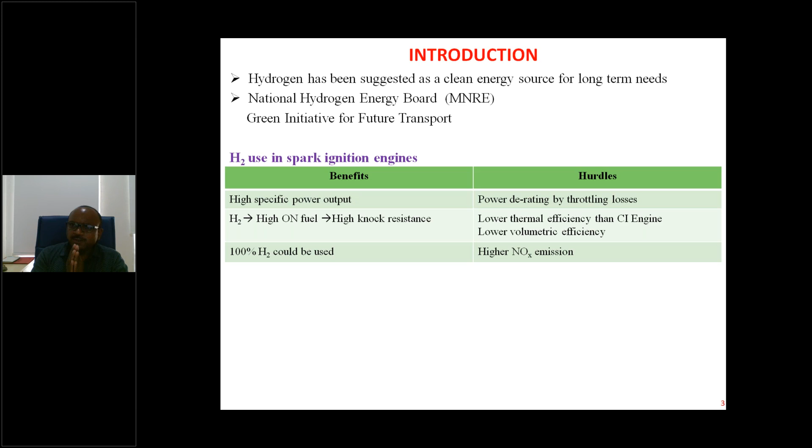However, we are using hydrogen in diesel engines because in our India, diesel consumption is high. Are you able to see the second table? India is a diesel driven economy. Last line, are you able to see the diesel to gasoline ratio? Yes sir, visible sir. Okay, very good. Diesel to gasoline ratio in India is 6:1, meaning 6 liters of diesel we use for every 1 liter of petrol.

In USA, diesel is used 1 liter, petrol is used 2.2 liters. In the entire world, average use of diesel is 1 liter and petrol 1.1 liters. So as per the Indian context...

...as we use more amount of diesel, in other sense, we use heavy duty vehicles, diesel engines. We use diesel engines in all heavy duty vehicles - buses, trucks, transport vehicles, mass transportation, public transportation, even marine transportation like ships, and rail transportation, locomotives, where diesel is used. One of the largest consumers of diesel in India is railways, they consume almost 35 to 40% of the total diesel in India. Next, many heavy duty vehicles are run with diesel engines.

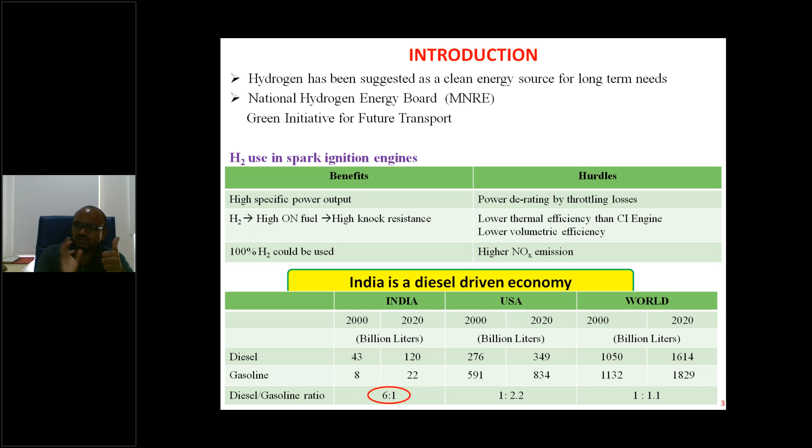Using hydrogen in diesel engines has certain complications. One major issue is we cannot utilize the full amount of hydrogen in diesel engines, meaning we cannot fully replace diesel with hydrogen. Like in a petrol vehicle, I can remove the petrol tank and employ a hydrogen tank to supply hydrogen fuel, and the petrol vehicle runs. The same thing cannot be done in diesel vehicles.

In a bus, I cannot replace the diesel tank with a hydrogen tank. The diesel tank cannot be replaced with a hydrogen tank. Hydrogen cannot be used fully in diesel engines.

What is the reason? Can anyone guess? Why can't we use full hydrogen in diesel engines? Can anybody guess the reason?

Gaseous combustion. Better combustion. Yeah, maybe due to combustion issues. Very good, combustion issues are the major problem. So this may be due to the proper... Sir, am I audible? Hello? Yeah please, everyone is audible.

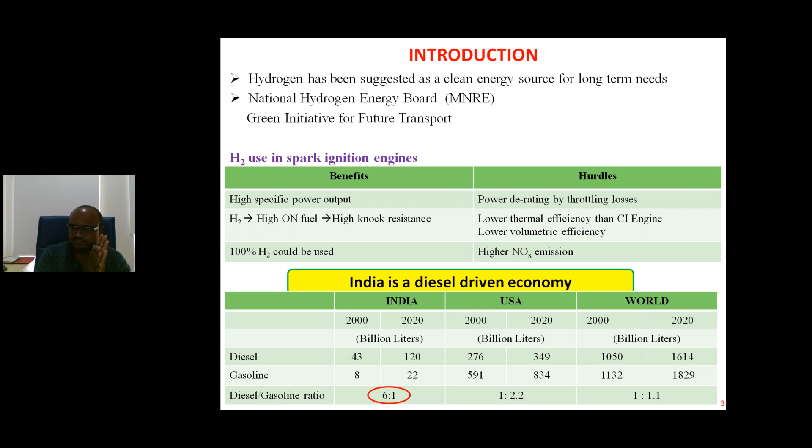We need certain ignition aid, certain ignition supplementation. Like in our home kitchen, while starting a stove, you give one spark. That spark is enough to burn the entire LPG, entire butane, or entire gas. If it is PNG, entire gas. In the same way, in a spark ignition engine, a petrol engine, you use a spark plug. It creates the spark, and that spark is enough to start the combustion.

In case of diesel engine, there is no spark, so ignition cannot be initiated by itself in a compression ignition engine. In order to address this issue, either we can provide an external spark plug in the diesel engine, or we can use a small amount of diesel for starting the combustion.

Once combustion is started, it spreads throughout the combustion chamber. Suppose in the combustion chamber I have 100 units of hydrogen particles. If one particle is ignited, that spreads the ignition or combustion to the other hydrogen particles.

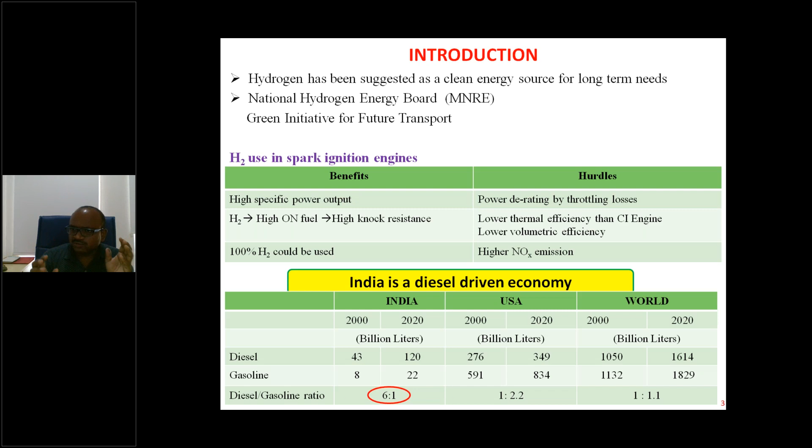With one matchstick, we are burning the entire village. One matchstick is equal to a small amount of diesel fuel, and the entire village refers to the hydrogen fuel. That is why the concept of dual fuel comes into the picture.

As I am using diesel and hydrogen, both fuels in a diesel engine, the concept of dual fuel engine arises. Dual fuel, in the name itself, indicates two fuels are being used simultaneously.

I would like to mention a basic difference between bi-fuel engines and dual fuel engines. You might be aware of CNG and petrol fueled vehicles. In cities wherever CNG infrastructure is laid, like Delhi, our city Vadodara, Bombay, Hyderabad, many metropolitan cities, Vijayawada, you have CNG fueled autos, buses, and transportation fleets.

CNG and petrol, both are used in these vehicles. If CNG is not available, you can run the vehicle with petrol. Those vehicles are called bi-fuel engine based vehicles. Bi-fuel engines are different than dual fuel engines.

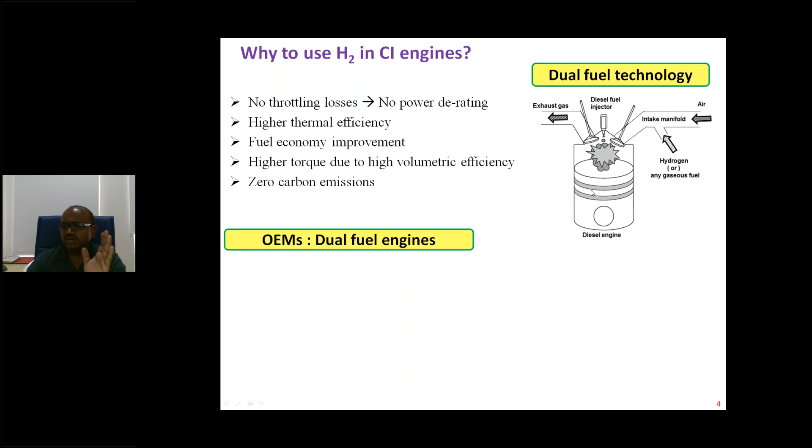So if the hydrogen fuel is exposed to any slight kind of spark, or sometimes tolerable temperatures, then accidents may happen. So safety aspects are the third modification that you need to address, other than the basic engine configuration. Okay, let us move ahead.

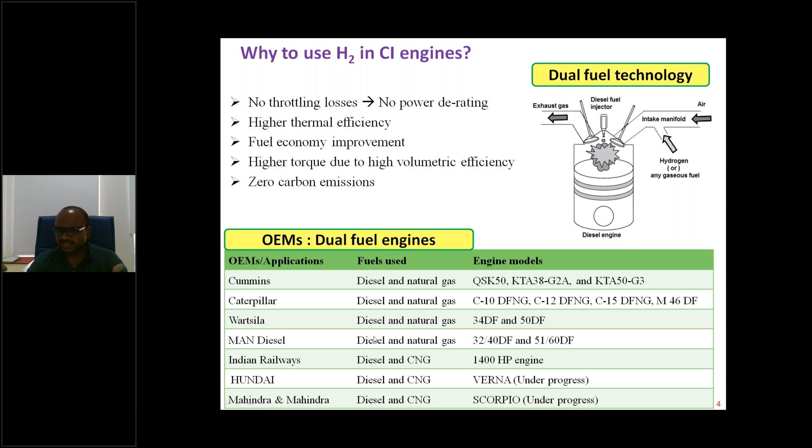Many dual fuel engines can be found in practice. Already some commercialized dual fuel engines are available in the power generation sector, even in the transportation sector. Some of the companies I have mentioned here.

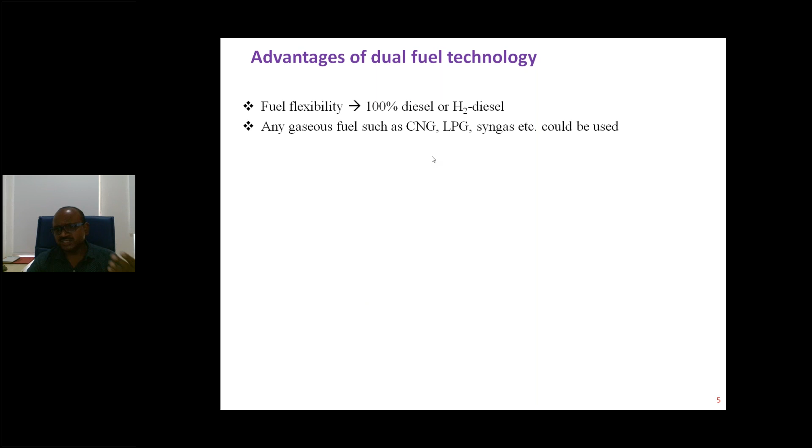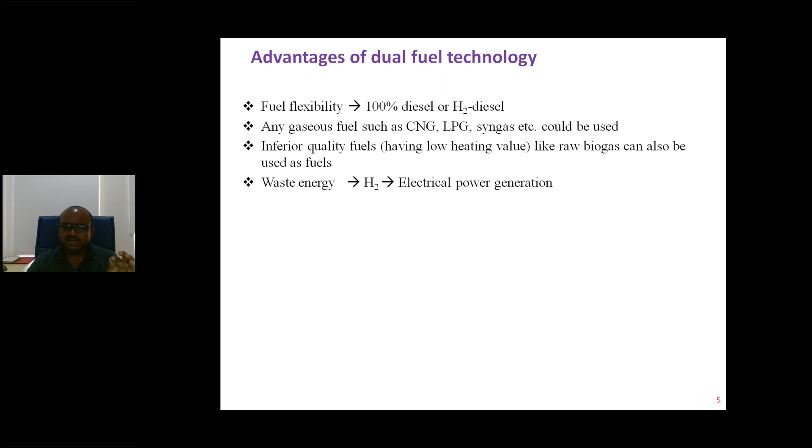As I mentioned, many advantages are there with dual fuel technology. You can use 100% diesel if hydrogen is not available, or any low inferior quality fuels like LPG, CNG, which have lower calorific value, can also be used in dual fuel technology. Instead of hydrogen, you can also use CNG, LPG, and syngas. Even biogas, which is generated from waste, can be used in diesel engines under dual fuel mode.

Hydrogen can be produced from various kinds of resources, starting from any waste, any organic waste material, to water. With simple water also you can produce it. Higher thermal efficiency, carbon emissions zero, less smoke emissions - these are all the different advantages.

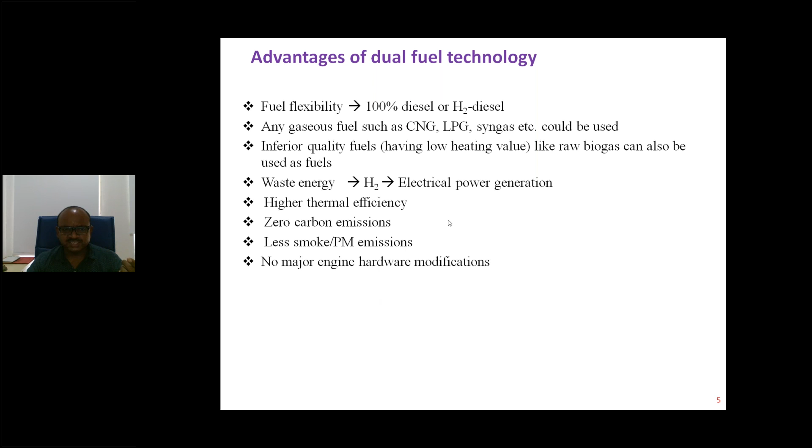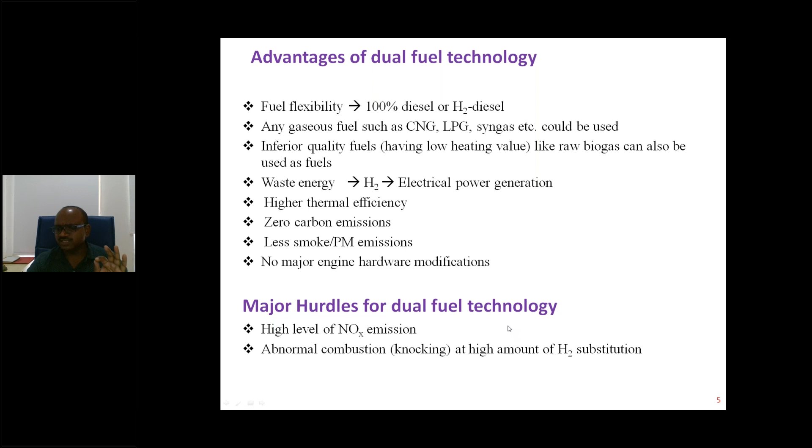However, as we are discussing, the major hurdles, major difficulties in use of hydrogen in diesel engines are higher NOx emissions. Though carbon emissions are zero, NOx emissions - oxides of nitrogen, NO, NO2, NO3 - these kinds of emissions are high in case of hydrogen fueled vehicles. And combustion problems like abnormal combustion is the biggest problem in utilization of hydrogen in diesel engines. So we need to tackle these disadvantages, these hurdles, while implementing hydrogen in diesel engines.

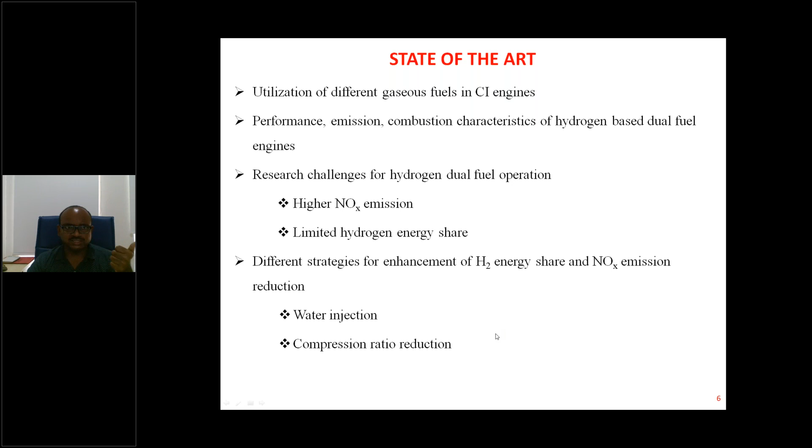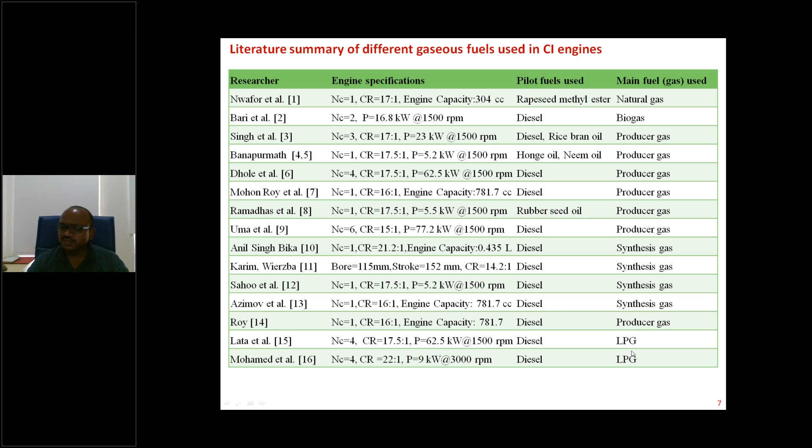As time is limited, I'm just skipping the state of the art. You can go through the literature where you can find use of different kinds of fuels, not only hydrogen, like natural gas, biogas, producer gas, synthesis gas, LPG can also be used in diesel engines under dual fuel technology.

If you go through the state of the art literature, you can find that hydrogen was used in diesel engines with less quantity. Maximum amount of energy used at full rated load, 100% load, is 16% in the literature, without modifying or any major engine modifications or any other strategy employed. Some people have achieved up to 14% of hydrogen energy without major modifications. This is what the literature concludes.

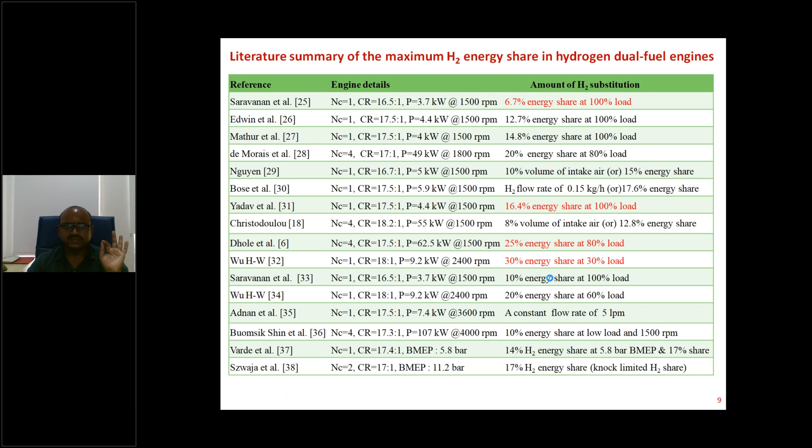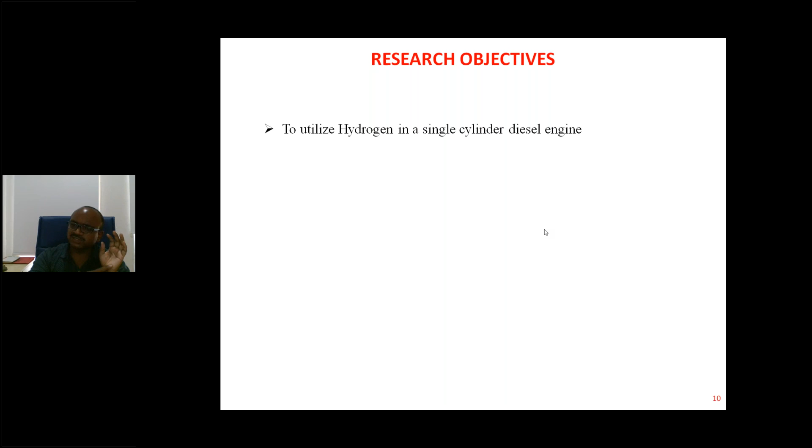With these conclusions from the state of the art, our future ambition is to enhance the hydrogen energy share in the diesel engine from 16%, which was reported in the literature, to higher limits. Without changing any engine configuration, you can add hydrogen in the engine up to 16% energy. That is what literature says.

Now my research target was to enhance this limit to higher limits. The higher limit may be 20%, or it may be 30, 50, 60, 70, 80%, by employing even a small modification or some additional technology or additional equipment with the diesel engine. So these are the main goals: enhancing the amount of hydrogen supply with different strategies and comparing the different strategies.

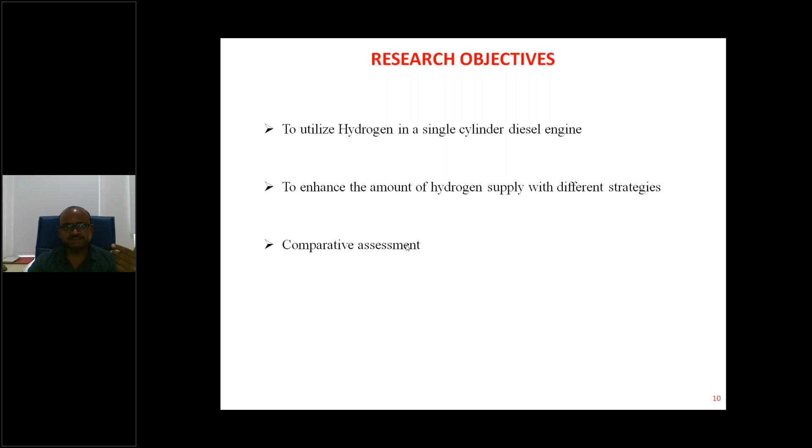For this, the research methodology is basically about developing the experimental setup and then conducting experiments on the basic engine without changing any modifications, employing hydrogen, to find out what is the tolerable limit with my original available engine. In the third stage, I need to employ any additional technology or additional media or additional fitment so that I can enhance the hydrogen energies to higher levels.

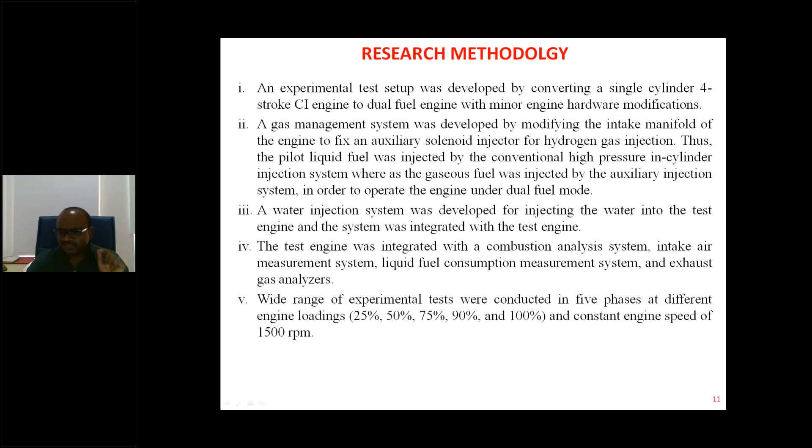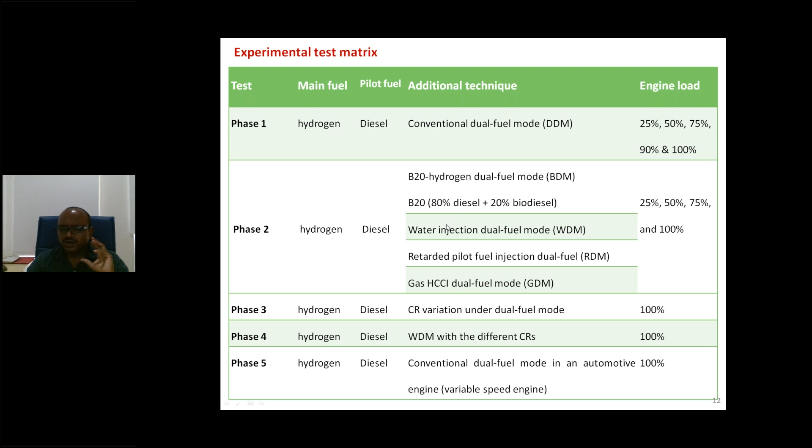For this research target, I have structured the total experiments into 5 phases. In the first phase, a basic configuration of experimentation has been done, called conventional dual fuel mode, where hydrogen is used as the main fuel and diesel as the pilot fuel at all engine loads. In the second phase, I conduct experiments with different strategies like using biodiesel, water injection, retarding the fuel injection, or using gaseous homogeneous charge compression ignition. These are the different ways to enhance the hydrogen energy share in the diesel engine.

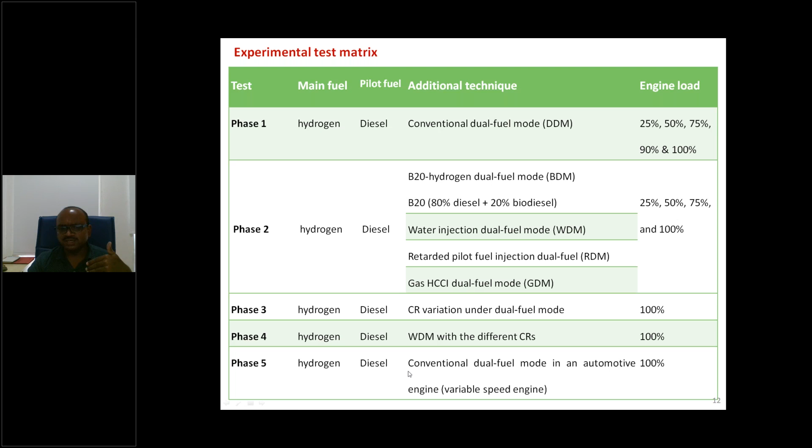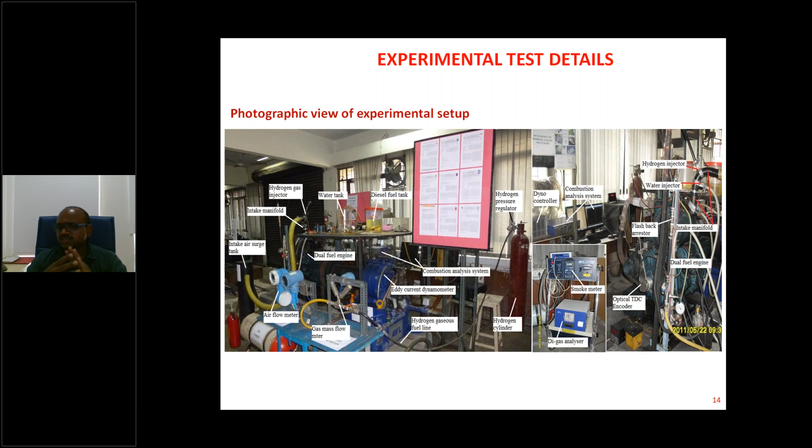So the basic experimentation consists of measuring parameters related to the fuel, the air, the water, and the biodiesel, whatever fuel is being applied, and related to the pollutants. These are the basic measuring devices and measuring domains that I have shown in the picture.

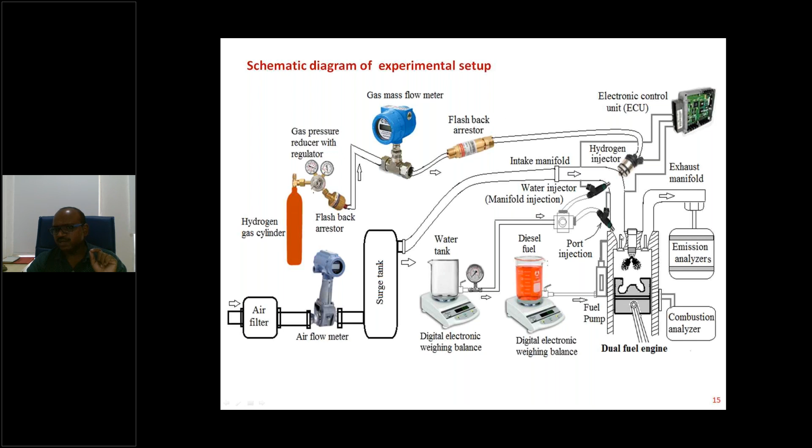This is the schematic diagram which clearly represents the entire experimental setup. You can clearly understand this is the hydrogen line from cylinder to flow meter, flashback arrestor to the hydrogen gas injector, which is controlled by the electronic control unit, and hydrogen is injected in the intake manifold. This is the air flow line for air consumption, and this is the fuel consumption line. As I mentioned, water is also inducted and measured in the intake manifold or intake port.

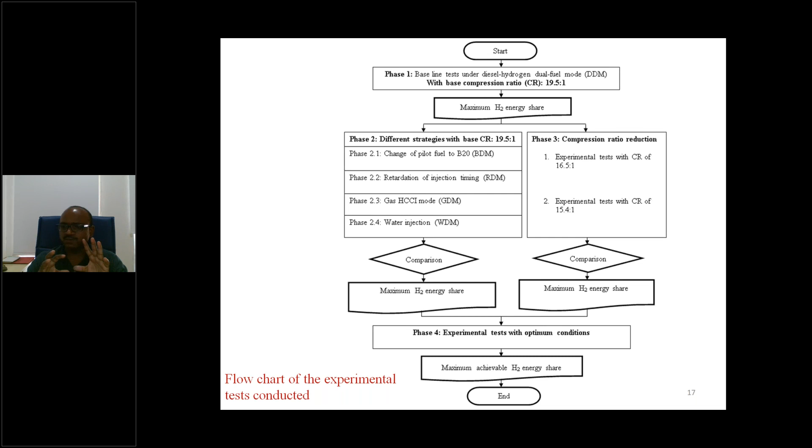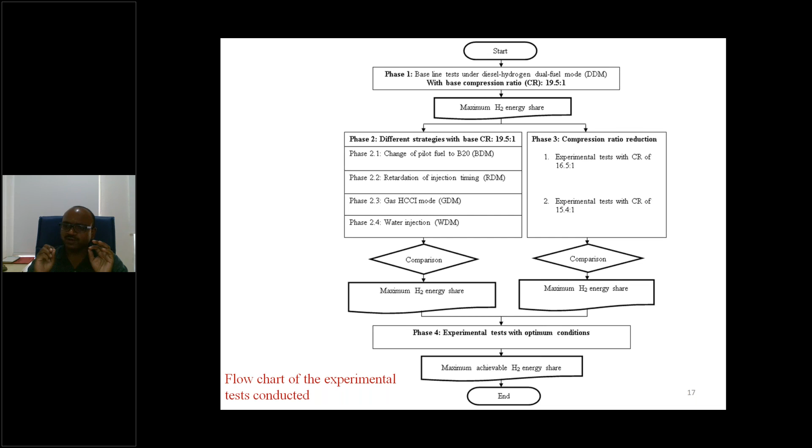With this phase 1 experimentation, my objective is to find out the tolerable hydrogen share. Tolerable hydrogen share means without disturbing the engine, without disturbing the combustion, without disturbing the efficiency, without disturbing the emissions, how much amount of hydrogen can be substituted or added in the engine. That is my first goal in the first phase of experimentation.

Once the maximum hydrogen energy is known with the first phase experimentation, then with the preliminary results, I can...

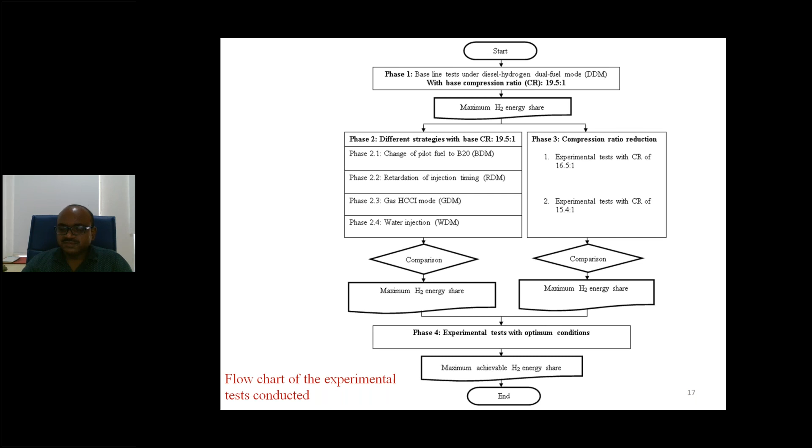There seems to be a network issue, the audio is coming slowly. Let me speak louder. Someone mentions it is a problem with others also, but confirms the voice is clear and audible, no issues at all.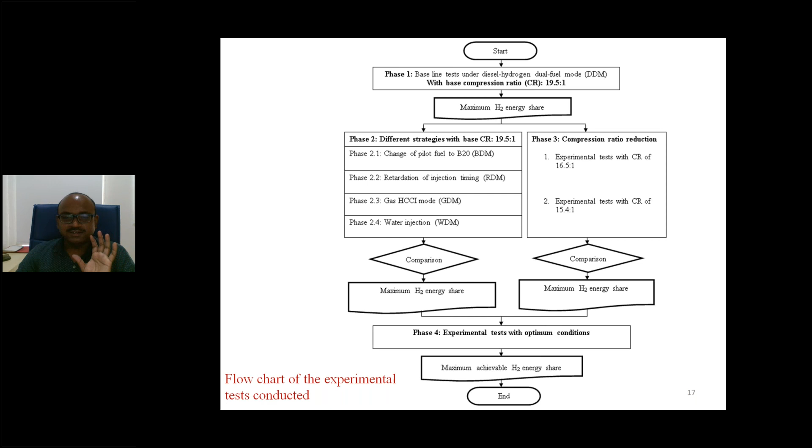Good, thank you. So try to understand this flow chart. I'm a bit in a rush because many slides are ahead, but I will try to provide the concept so that you can get the clutches of the work.

In second phase, once after knowing the basic preliminary data that my actual engine can absorb the hydrogen this much share, say 16%, 17%, or 18%, I need to add some more technology or strategy to boost the hydrogen share. In second phase, I apply biodiesel, retardation injection, gaseous hydrogen, homogeneous charge compression ignition (HCCI) mode, and water injection mode. With this, I can increase some amount of hydrogen level.

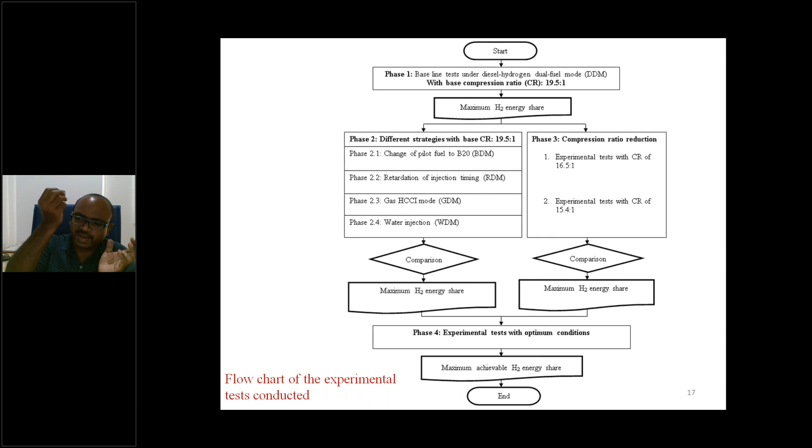In the third phase experiment, by reducing the compression ratio, I can still increase some amount of hydrogen. By comparing these two results, I can take the advantage of second phase experimentation and the advantage of third phase experimentation, then combine these two benefits in the fourth phase experimentation so that at the end, hydrogen share could be increased to the maximum extent. That was my final goal.

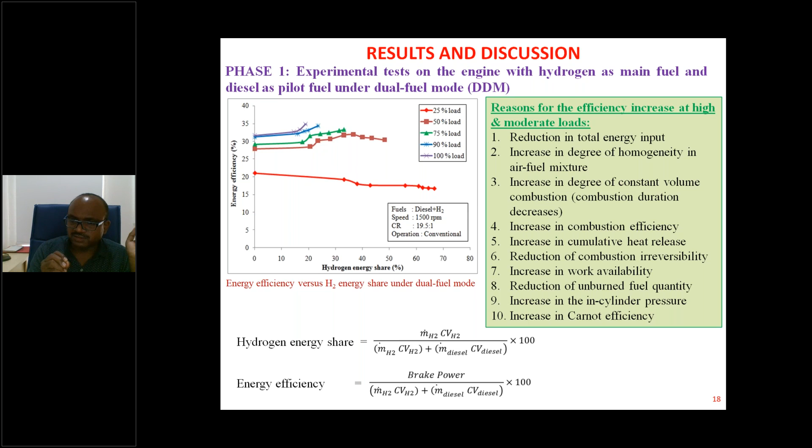Other reasons I have mentioned here, you can go through later. Not only energy efficiency improvement, not only fuel economy improvement with the hydrogen implication, we can also observe - let me explain.

Not only with efficiency, it also helps for pollution reduction. Let me just go through the slides, figures which are evidential for the efficiency improvement. Here you can see specific energy consumption is being reduced, because of which hydrogen energy efficiency is being increased.

Ignition delay is being decreased with hydrogen, so efficiency is increased. Combustion efficiency will improve with increasing amount of hydrogen share. This graph represents combustion efficiency, and combustion duration is decreasing. As the flame speed of hydrogen is high, the total time taken by combustion, known as combustion duration, reduces.

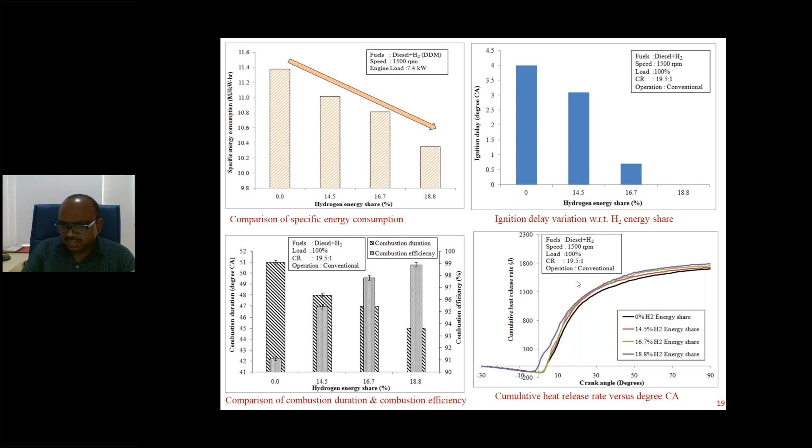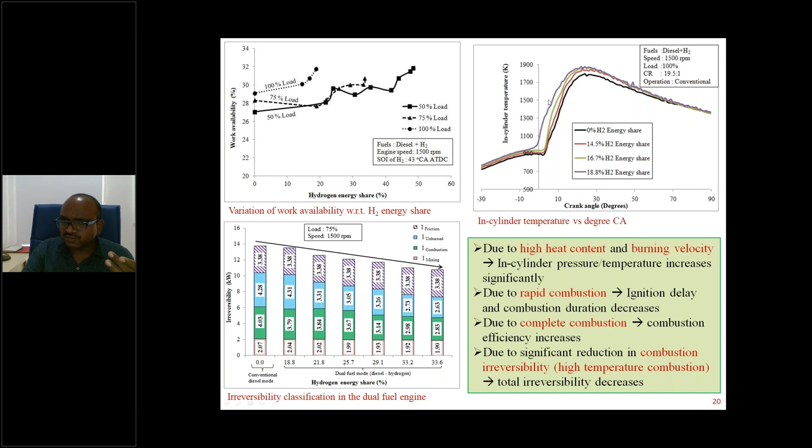These are all evidential proof for higher energy efficiency. This cumulative heat release also increases with hydrogen, and exergy efficiency will also increase. In-cylinder temperature also will increase. This is the combustion parameters, which I will be explaining tomorrow, so I'm skipping now.

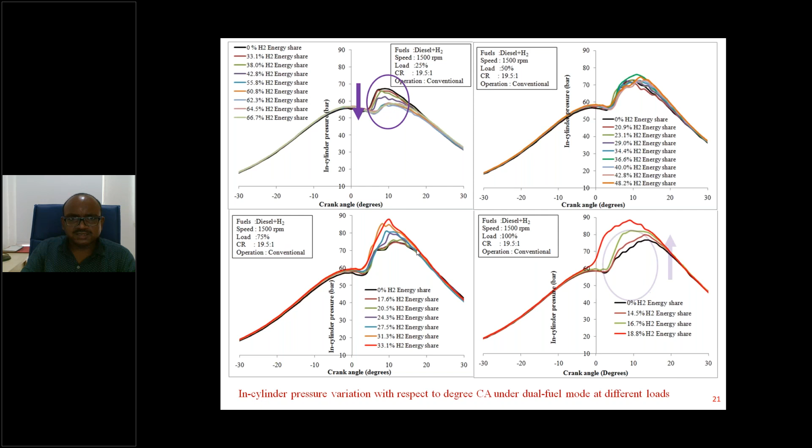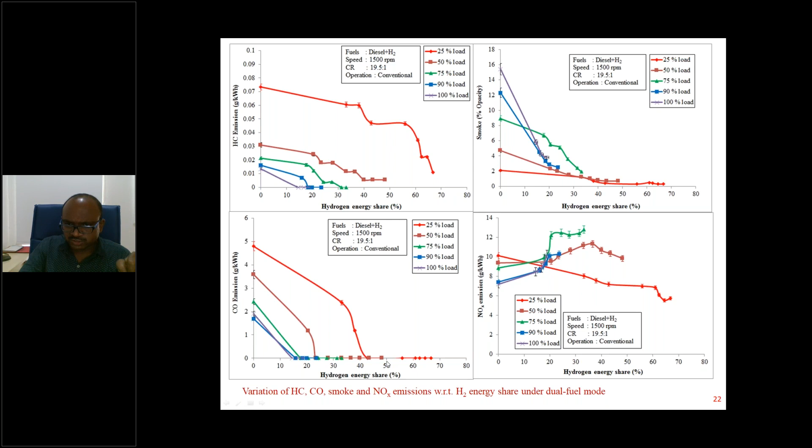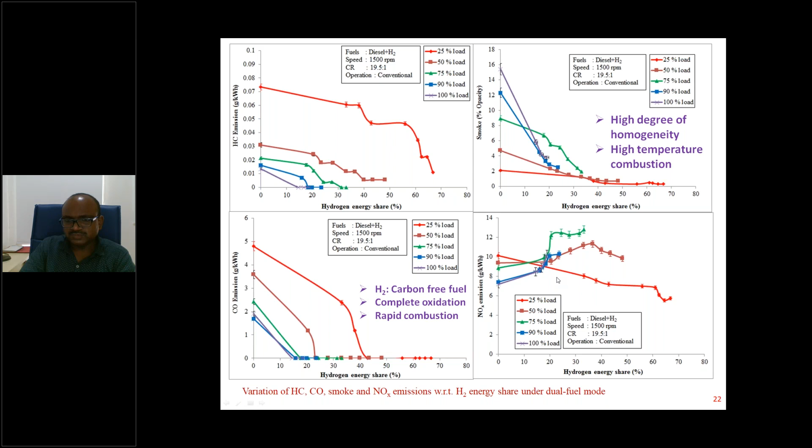But for today's class, let me conclude with this work. With the basic configuration of the engine, without changing any major modification, I can use hydrogen amount maximum of 18.8%, roughly about 19%, without changing any major modification. In my first phase of experiment, my major conclusion is at rated load, at full load, hydrogen share is 19%.

If you want to analyze any engine assessment, if any vehicle has to come into the market, it is usually tested at peak loads, at higher loads. In this graph, at lower loads, 25% load, hydrogen share is 66%, at 50% it's 48%, but this is not counted for complete rigorous analysis of hydrogen. So I would be considering at rated load, the maximum hydrogen share is 19%.

Now my entire work in future is keeping the target level, minimum target level 19. If I use any additional technology which increases the hydrogen energy share beyond 19%, then that is adaptable, that is suggestible.

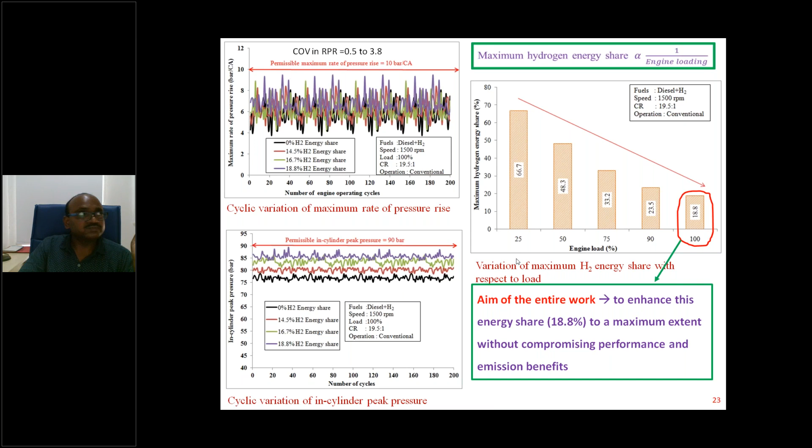With the first phase experiment, I can come to a conclusion that 19% is the maximum amount of hydrogen I can implement in the engine without compromising the emissions or the efficiency.

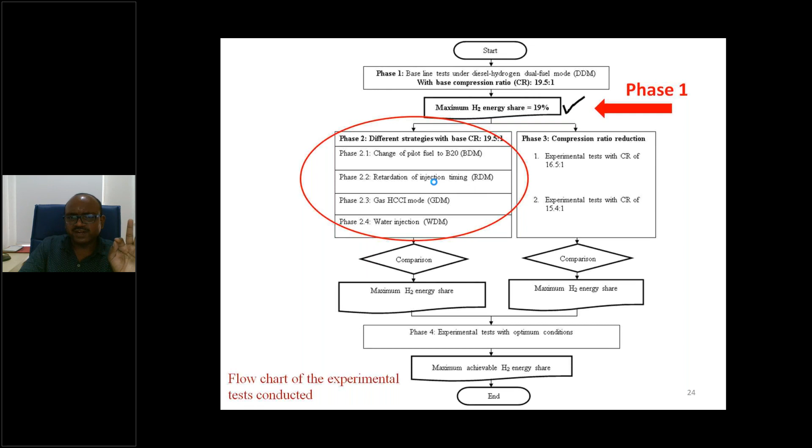Now my second phase experiments with different technologies. One is retarded injection timing. Retarded injection timing is basically when the diesel fuel injection timing is slowed down in order to enhance the hydrogen energy share. As time is limited, I'm not going through the detailed reasoning why we need to retard in order to increase the hydrogen energy share. If you want to go through, you can refer to my papers, you can clearly understand.

So for this experimentation, I have retarded about 1.7 degree crank angle, which is mentioned here in purple color. For increasing hydrogen in the engine, another strategy I employed is retarding the diesel injection by 1.7 degree crank angle, meaning slowing down the diesel fuel injection using some modification in the fuel injection pump.

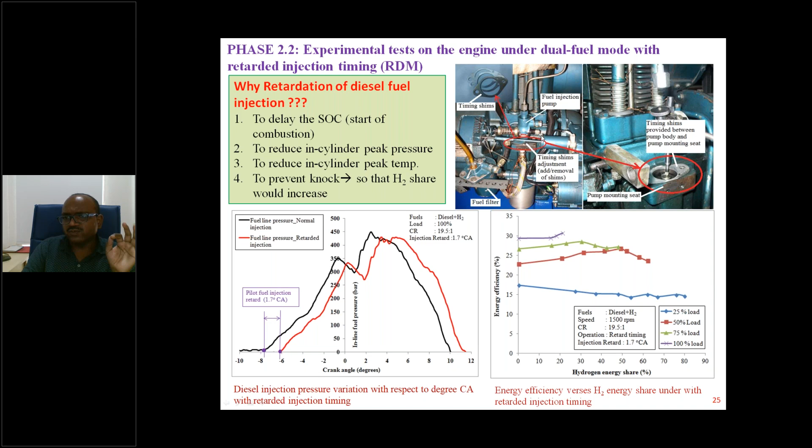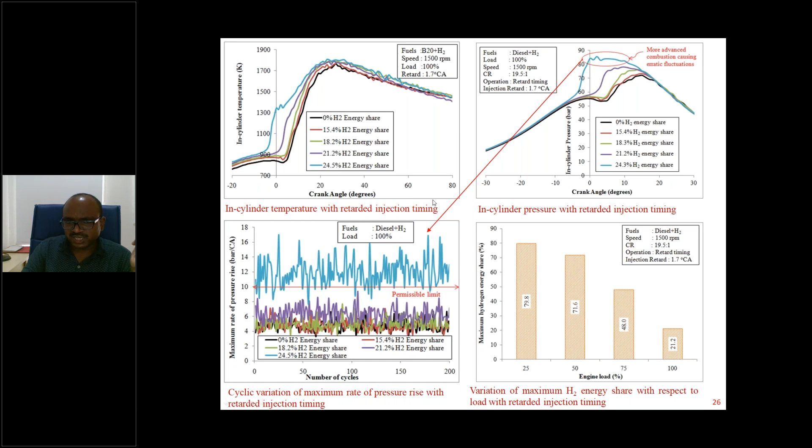With these results, I can assess that in the fourth graph, with the retarded injection timing at 100% load, the energy share has increased to 21%. Earlier it was 19%, 18.8%. Now with this technology, the energy share has been increased to 21%.

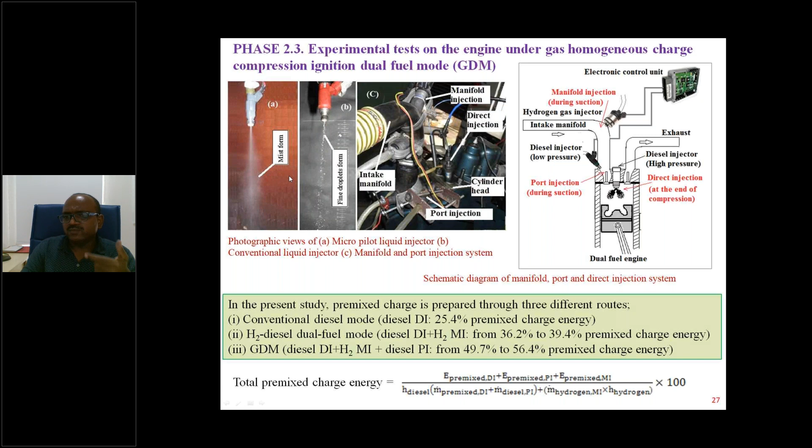The third technology I employed involves injecting the diesel fuel in the intake manifold. I have injected a small amount of diesel fuel in the intake manifold, which reflects the homogeneous charge. By inducing the homogeneous charge, I am referring to how much hydrogen can be enhanced. With this technology, I can increase the hydrogen energy share to 23%. Earlier it was 18%, now it is 23% with gaseous homogeneous hydrogen charge technology.

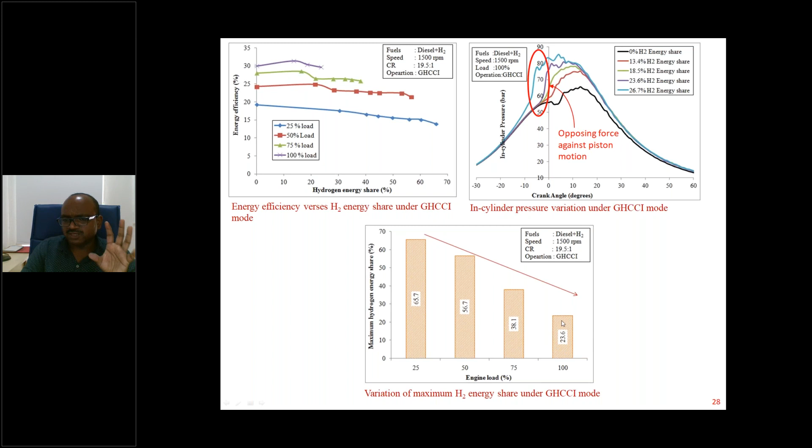I'm not going through the details of how HCCI has been achieved and what modifications were done. I'm just taking out the summary of the experimentation for comparative assessment purposes.

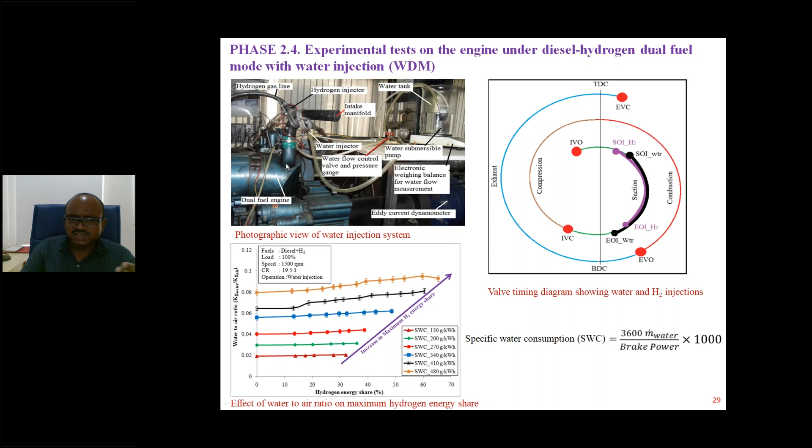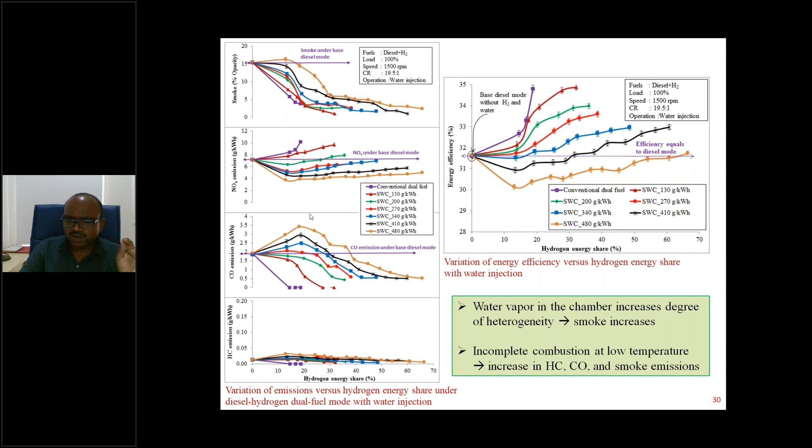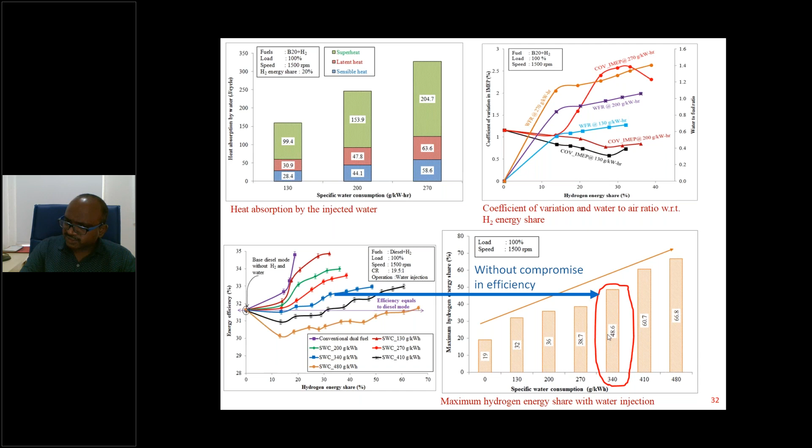And the fourth technology that I have inducted is water. Water has been injected in the engine in order to enhance the hydrogen share. These are the results with water injection. I have compared the efficiency terms as well as the emission terms, efficiency and all pollutants. Without compromising the efficiency and pollutant benefits, I can increase the energy share to 48%, from 18.8% to 48%, with the water induction technology.

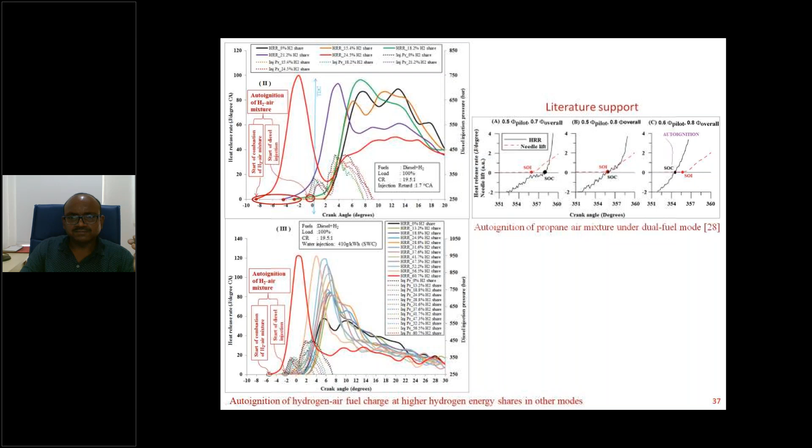Let me conclude all the experimentation in the second phase. I have conducted experiments with retarded injection timing and biodiesel implementation at 20%, retarded injection timing at 21%, gaseous HCCI technology at 24%, and water injection with a certain amount of water at 68%.

340 is the water quantity level, and 480 gram per kilowatt hour is another water quantity. In the water injection experimentation, I used different quantities of water. For 340 gram per kilowatt hour, what is the hydrogen energy share? For 480 gram per kilowatt hour, what is the hydrogen energy share? So I took a couple of water shares and compared the maximum hydrogen energy share.

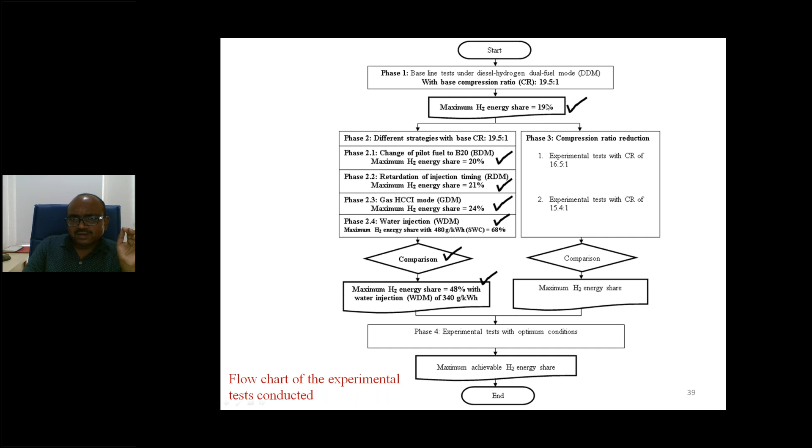If I observe the entire second phase experimentation, I can assess that the hydrogen energy share has been increased from 19% to 48%.

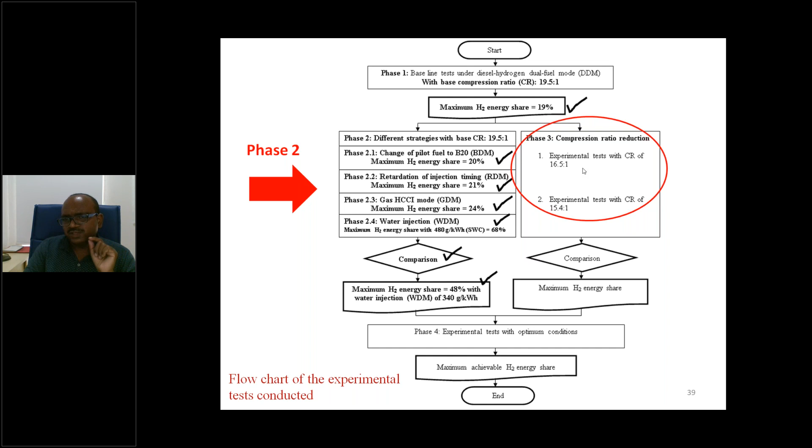Now with the third phase of experiments, I changed the compression ratio. The original engine has a compression ratio of 19.5:1, which was modified to 16.5:1 and 15.4:1. These are the modified compression ratios.

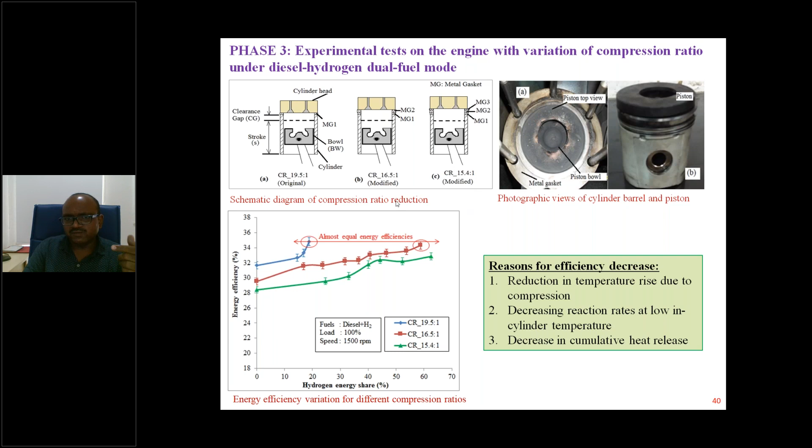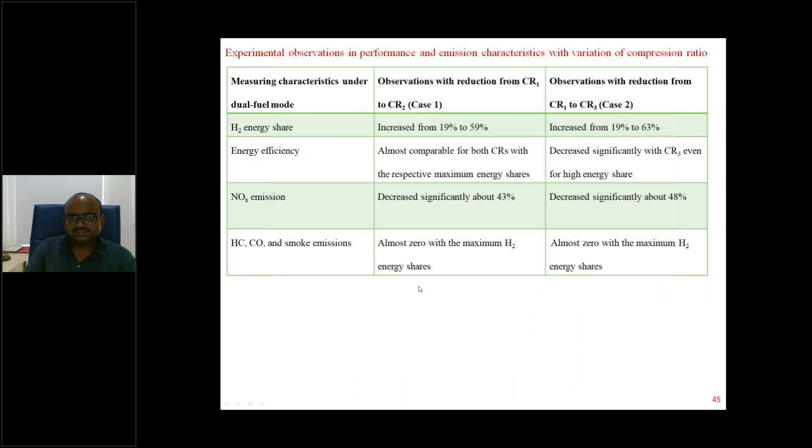With this, again I compared the different hydrogen energy shares. With this change in compression ratio, reducing from 19.5 to 16.5, the maximum hydrogen that I can substitute is 59%. With the further reduction of compression ratio to 15.4, the maximum hydrogen share was about 63%.

Now for the optimum case, meaning without compromising engine efficiency and without compromising emission benefits, the maximum hydrogen energy share achieved with compression ratio modification is 59%. With the employment of second phase strategies at optimum conditions of efficiency and emissions, the maximum hydrogen energy share is 48% with water injection of 340 grams.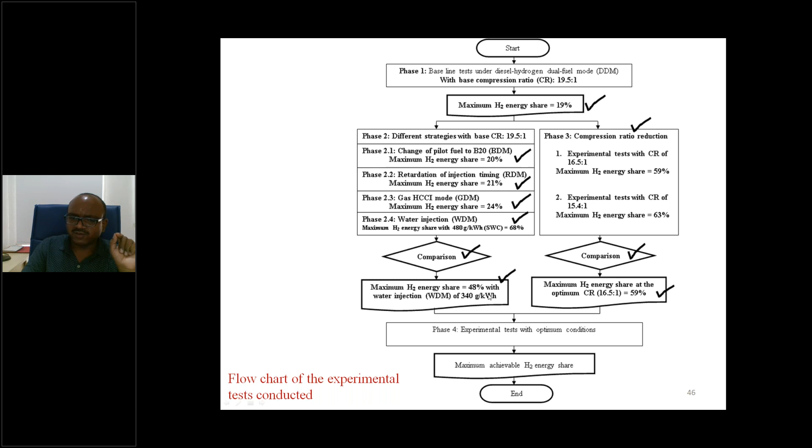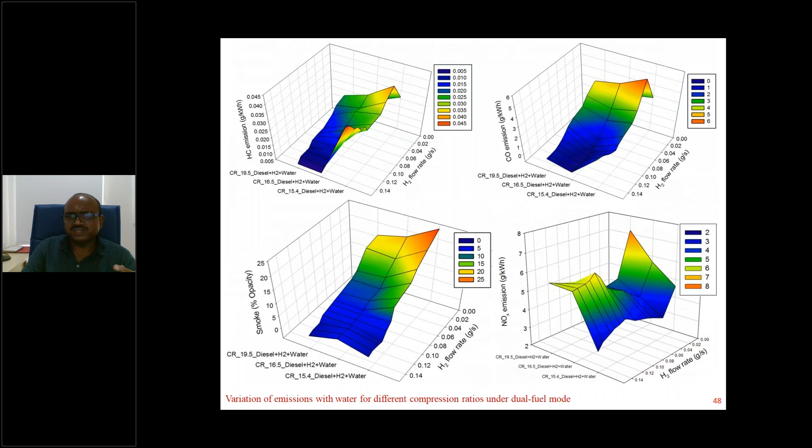Now with these two optimum conditions, I conducted the fourth phase of experiments, where again I measured the efficiency terms, combustion terms, and emission terms. Without compromising the efficiency and emissions terms, the maximum amount of energy share increased to 79%, with the conditions of 16.5:1 compression ratio and a water amount of 340 grams, the maximum energy share increased to 79%.

Now a remarkable improvement can be observed if you compare from...

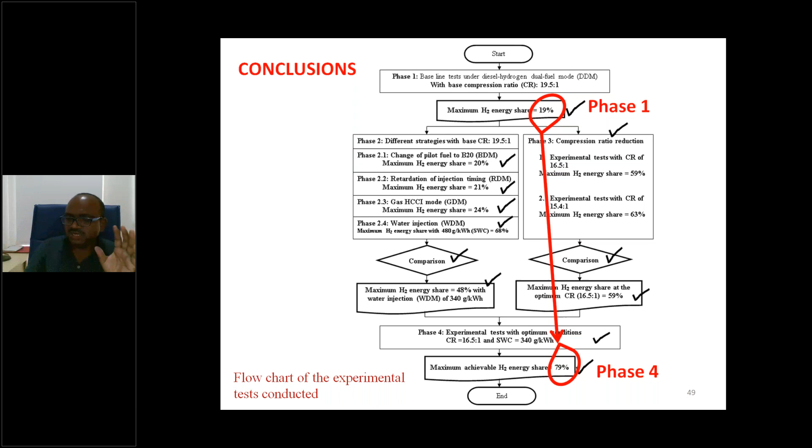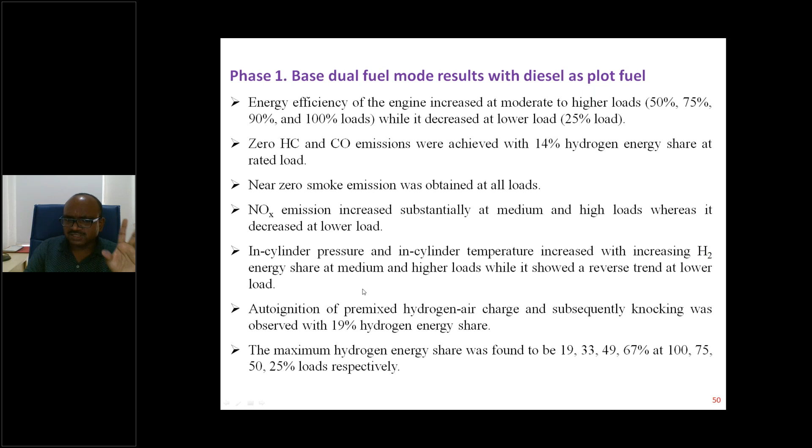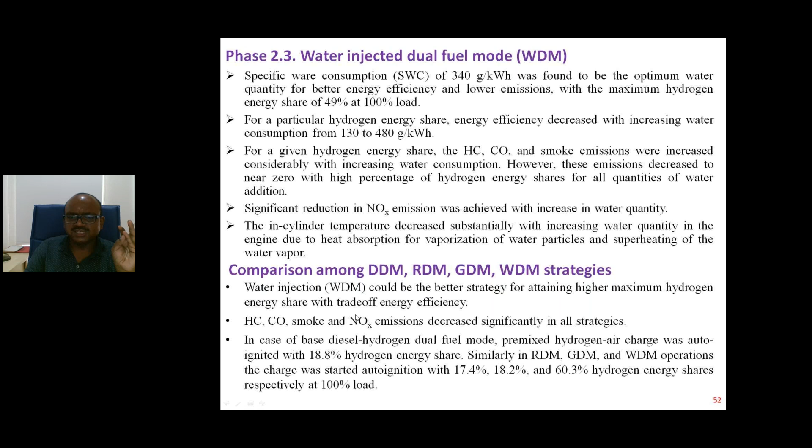Whatever the technology you use, the main motto is to enhance the efficiency and hydrogen share without affecting the efficiency or the emissions. The detailed conclusions I have mentioned here. With phase one, I've shown the benefits in terms of efficiencies and emissions. Similarly, with the second and third phase experiments, I have mentioned the benefits and limitations. Thank you. If you have any queries, you can kindly raise them.

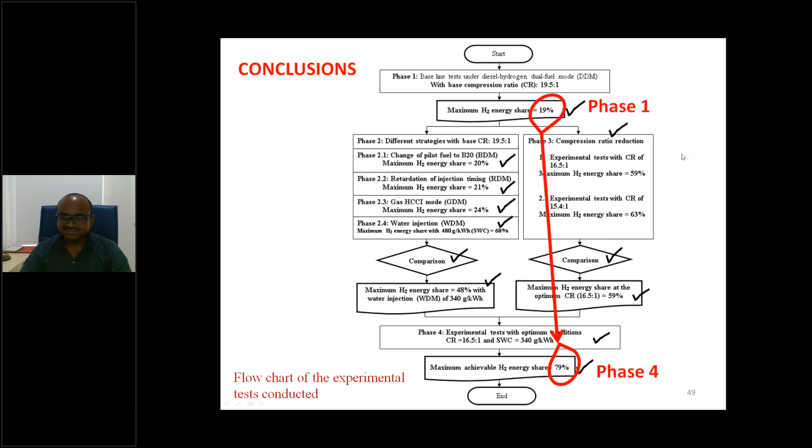Thank you, sir. Thank you, Venkat sir. Thank you very much. Thank you, sir. We'll meet you again, okay sir. Thank you, sir. And we will be hearing you, sir, for two more sessions if possible, so in those sessions also you can ask your doubts.